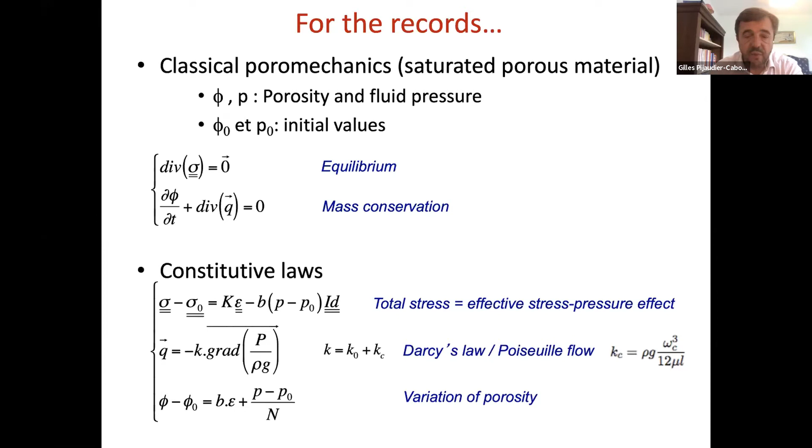Just for the record, so that we all have in mind that within this format everything should be coupled. Now these are the equations. The reality, let me first start with a very simplistic example: gas production.

What people do, at least in the industry, where they design the exploitation of a field. Here it's supposed to be a gas field. Let me just get a pointer there, where you have wells that produce and wells that inject. And of course, all the hydrocarbons are contained in a porous material, in a reservoir, in a porous rock.

And what people look at is just the permeability. This is an important parameter to them, and they absolutely don't care about the effect of stresses. In most cases, this is a generality, but usually, at least at the industrial level, from a very pragmatic point of view, when you design the exploitation of a site, you don't worry about stress. Still, you have a porous material.

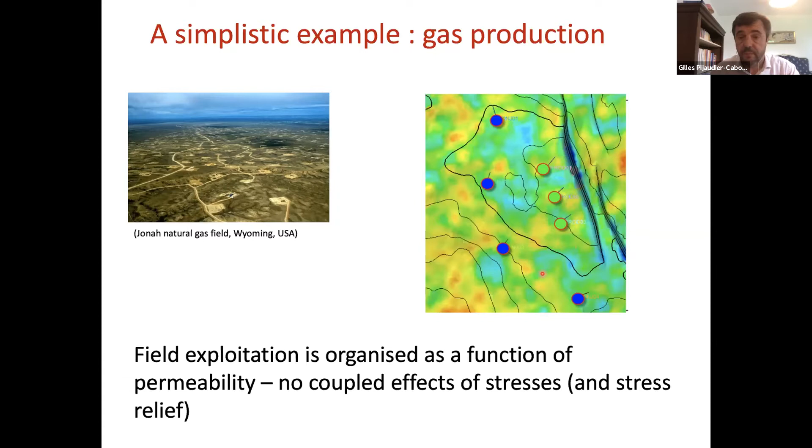Let's consider something which is a little bit more complex, and this is dealing with the safety of nuclear vessels. A couple of works that we did when I was in Nantes a few years ago, where we were concerned with the internal vessels, a specific design in France, where these vessels are made of pre-stressed concrete. You have a double layer vessel, and both are made with pre-stressed concrete, or one is reinforced and the other

is pre-stressed. Concrete is the third passive barrier in the safety design of such vessels, and it is monitored with decennial integrity tests. Basically, they apply a pressure inside the vessel. Of course, they stop everything. They apply a pressure, and they measure the leakage rate. And if the leakage rate is above a certain threshold, the facility cannot be restarted.

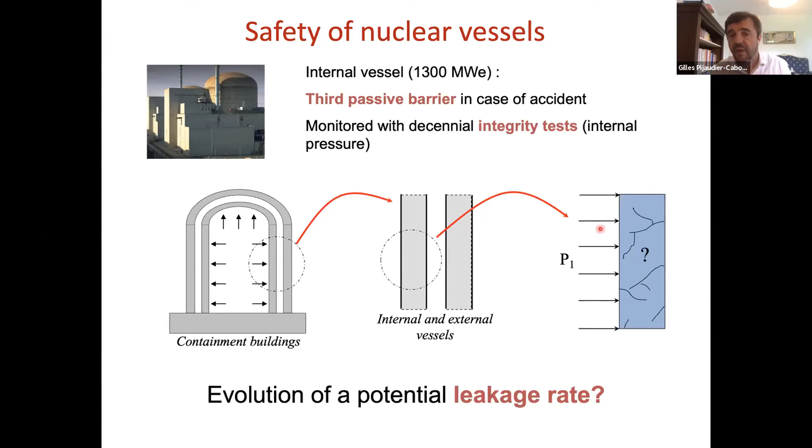So the issue is to evaluate a potential leakage, which is due to the aging of the concrete. And here you would expect that there is a strong coupling, at least between the solid phase and the fluid phase. The solid phase is made to prevent the fluid from going from inside to outside the vessel.

So typically what is being done now, it has most probably been a little bit improved, but not that much, because these are rather complex structures which are pre-stressed with passive steel bars, concrete, just considering a representative volume like this, and then you apply the pressure inside and you measure the leakage rate outside.

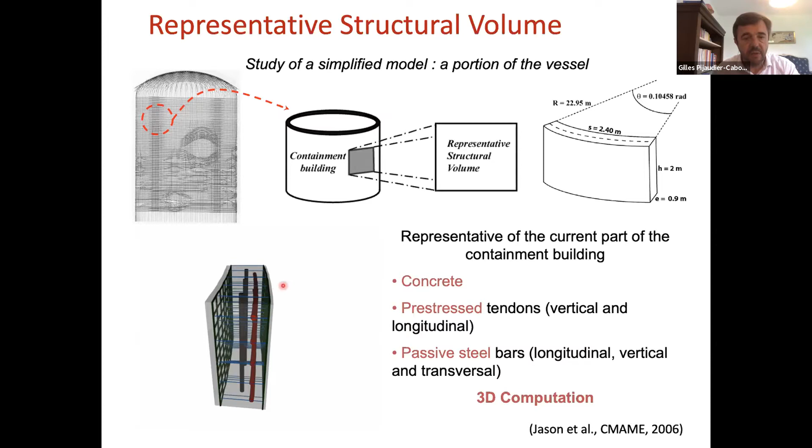And what is currently being done is first a mechanical calculation. Due to the internal pressure and the boundary conditions, you apply whatever mechanical model you want. Here it's an elastic plastic damage model, and you calculate the damage which results from the internal pressure on the vessel.

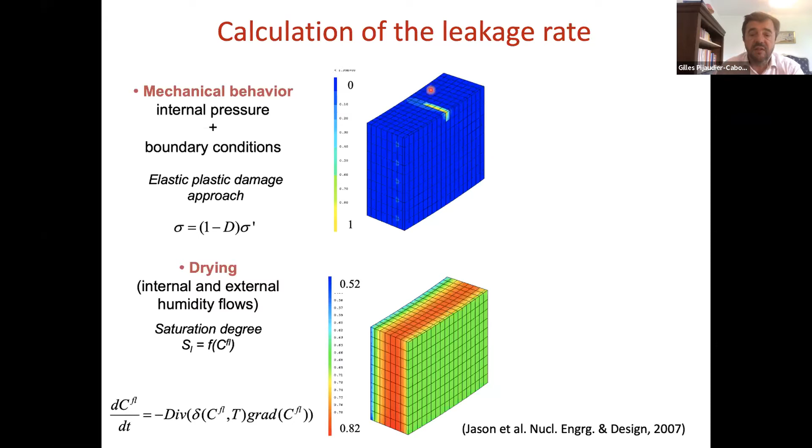Then you take into account the drying effect, and you perform a calculation of the profile of humidity, which is there. And separately you perform a calculation of the leakage rate based on the gas permeability. So you convert both information from the mechanical model and the hygrothermal model into a relative permeability to gas, and that provides you with some calculation of the leakage rate.

So here there is some coupling, but in fact everything is uncoupled. There is some coupling in the sense that the amount of cracking, the quantity of liquid which is contained in this representative volume has an effect on the fluid flow, but it is not coupled. It is just a one-way coupling.

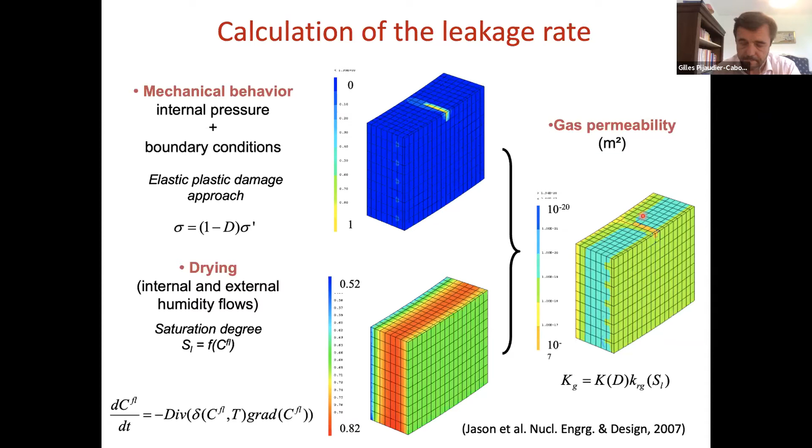Some more complex example. Here I took the case of adsorption of a single gas in a porous solid, with many applications in the industry, that concern carbon, but also cement paste, tight rocks, and many other porous materials. The issue is that in this case, the fluid is in small pores compared to mesopores and macropores; you have micropores of a few nanometers in size at most.

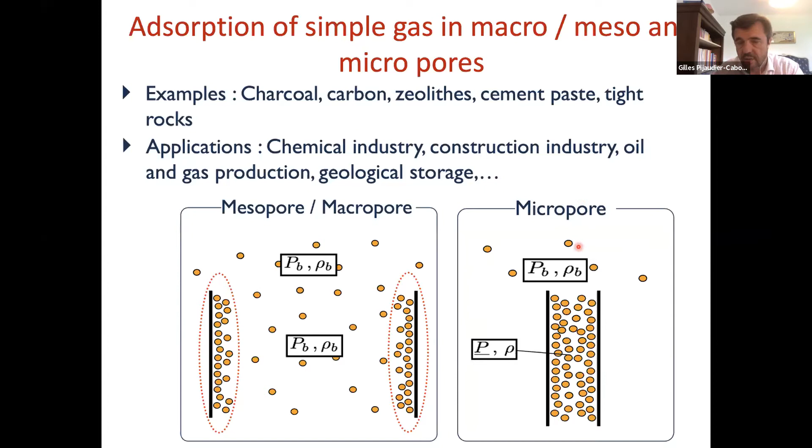The fluid that is concerned is confined by the solid phase, and it is in a different state as compared to the fluid in the bulk phase. Different state of pressure, different state of mass density. And that produces a very unexpected response. That is, if you take this piece of porous material, you saturate it with a gas, you increase the pressure, and instead of shrinking, it is going to swell.

And this has been measured quite a long time ago. Here you see some results of Levine in 1996, measuring the swelling as a function of the pressure in the fluid.

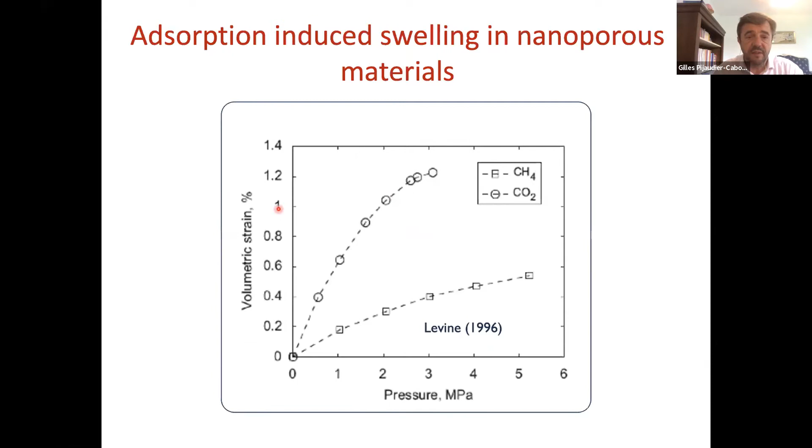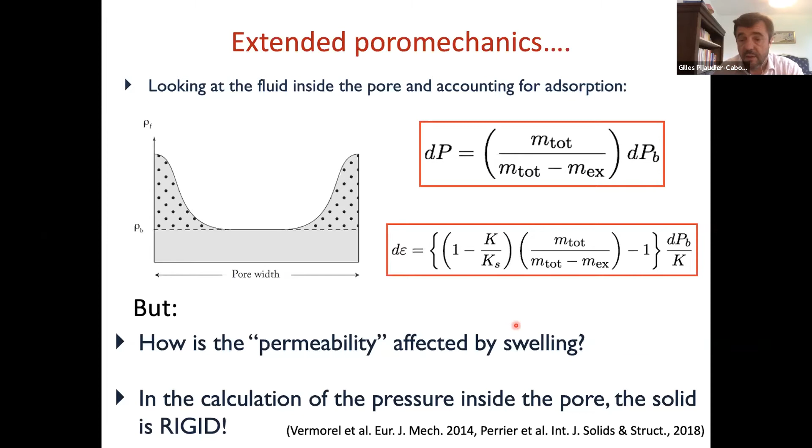And in this type of calculation, where you would expect that you have strong coupling between the fluid and the solid, in fact, the solid is assumed to be rigid as far as the fluid is concerned. And that is not a coupled scheme. It is coupled, but not completely. So what I would like to conclude with was that in most practical examples, you have indeed coupled effects, but they are not important. Whether they are second order effects or not, I wouldn't dare to say, but they are, for practical purposes, not very important.

When coupled effects are important, in most cases, it is a one-way coupling. It is not a two-way coupling. And I believe that Roland is going to share with us cases where you indeed find such a two-way coupled effect. Thank you very much.

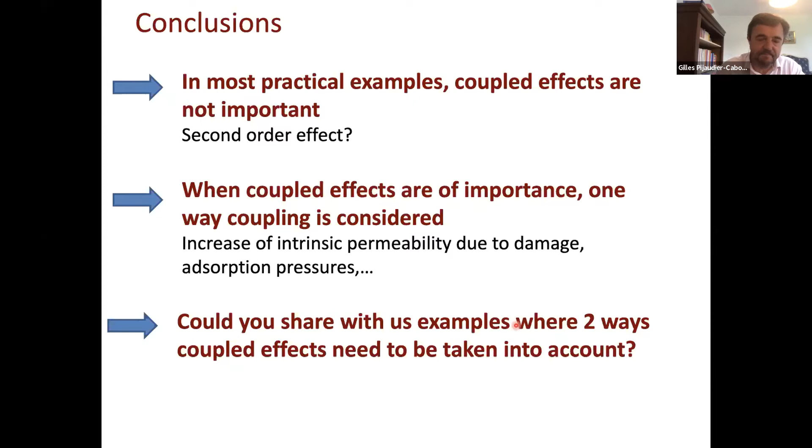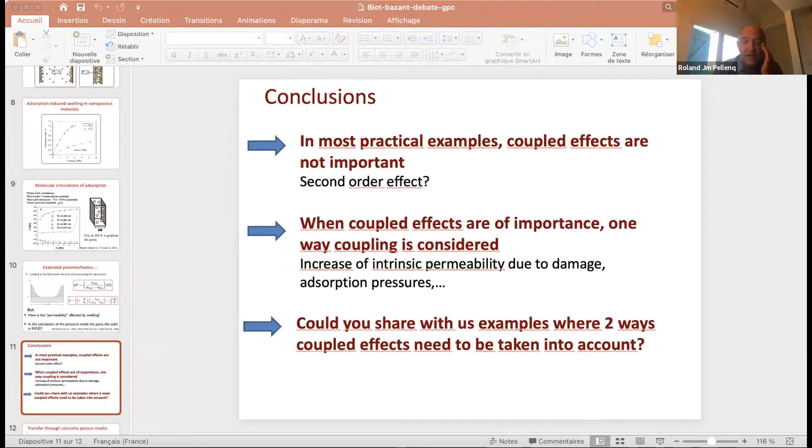Excellent. Thank you. Thank you, Gilles. And now is Roland for the arguments against. Yes, sir. Here I am. So who's sharing? Gilles, you maybe have to stop sharing your screen. Yes. That's done. Very good. Now I need to find my presentation. How's that working? Yes, it looks like we have some. Very good. Perfect. All right.

All right. So, well, thank you for the invitation. Can you invert the screen because we are seeing the... How do you do that? If you go to the top, there is swap displays. Where is it? To the top? Yes. Stop video. Where is it? Oh yes. Swap. Switch. All right. There we go. Very good. Excellent. Thank you. Because I have two screens there.

All right. So, well, I was saying thank you for the invitation. And actually, I was wondering about that format, this kind of debate idea, and at the end it turns out to be interesting. Obviously, I'm not opposing Gilles in what he was saying because it's obviously interesting. The idea was for Gilles to take the side of the solid matrix and me more where I'm coming from, which is the side of the confined fluid, and see how much the fluid is influencing the matrix and how much the matrix is influencing the fluid. So this is the way I'm going to go through this question, answering at the end. All right.

So next, talking about porous solids, I want to go down to what those are. Obviously, you can take simple ones, not so simple, but I'm saying simple because they are crystalline. So those zeolites. One of the leading members of the zeolite family, which is a family of 500 members, is the one called silicalite. It's been used in the oil industry to convert methanol into gasoline and so on. So the pure silica stuff, but you see, this is very ordered. That's the sketch of the pore network, and the size of the pores is typically 5 angstrom, half a nanometer, very small. Then we have the messy ones. For instance, porous carbon, still the same kind of pore size, but this is really more like a glass.

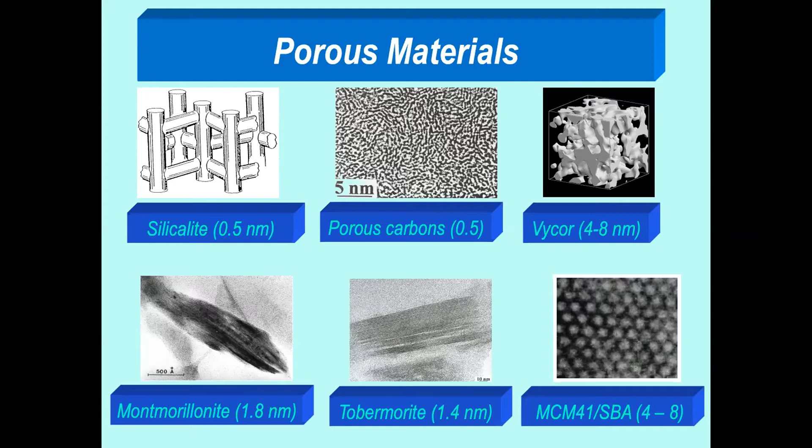Then I go to more ordered, those MCM and SBA, so still silica, but they are made from soft chemistry, where you do this ordering of an organic surfactant phase, and then you just burn it, and at the end you're left with the porous matrix, and these are proper cylinders. The walls are actually not crystalline like a zeolite, but the pore size, a few nanometers, is controlled by the size of those organic molecules.

And it's interesting because these are not connected. This is the most ordered thing that we can do. When I say ordered, they are not necessarily smooth along the channel. Could be some roughness, obviously, but okay, that's what we have.

And we have those two very dear examples, which are soil and clays, for instance, montmorillonite clay, where you have a swellable system, clay that does swell. And so the amount of confined fluid in between the lamellae is changing. By the way, this time the confined fluid is an electrolyte, meaning a solvent, water for instance, and some ions.

And the most interesting thing is that those layers are charged. That's why you have ions, and the ions are driving the intake of water in the system. It's a very coupled system.

And then we move on to cement or tobermorite. Tobermorite is not really cement, it is a mineral per se from the island of Tobermory in Scotland. And this is actually a layered system like clays, and charged. So again, you have ions in between the layers to maintain electroneutrality, and water as a solvent getting in because of the ions.

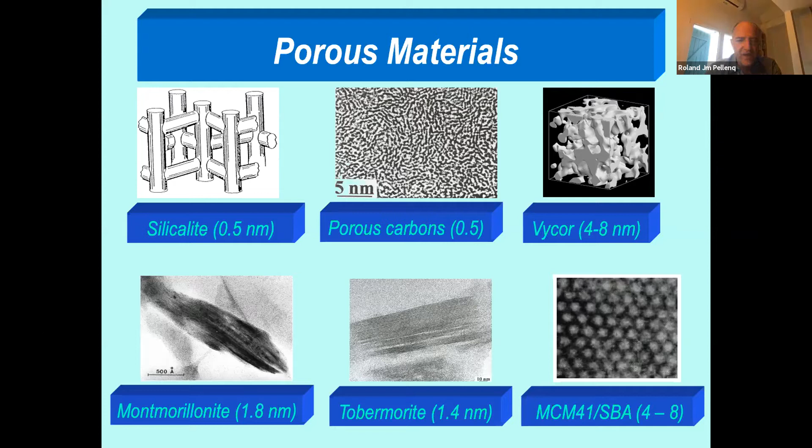All right, so let's move now to other concepts. Porous carbon is probably multi-scale. For instance, this is a porous carbon. This is a piece of wood at the scale of, say, 100 microns, and you see the cells of the wood. And now you dig down and you see some structure appearing. This is burned wood, actually. This is a charcoal, right?

As we zoom and zoom, you see other textures appearing. At the scale of 1 micron, you don't see much, but yes, there is substructure, because if you zoom again with a TEM microscope this time, not a scanning electron microscope, you start seeing nanopores clearly, up to the range where you see the scale of angstroms.

So those natural porous materials, as opposed to zeolites, are multi-scale. When I say zeolites are just one scale, it's not true, because you can gather grains of zeolite and build up a multi-scale porous material. The multi-scale is important because certain things can happen at certain scales and not at others. So that's one key element. Sorry, this is the further zoom at the scale of angstroms.

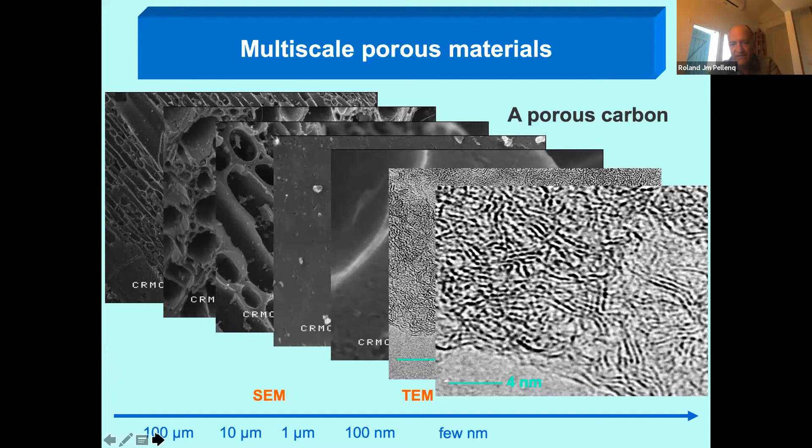All right, confined fluids. What kind of fluids? Molecular fluids, of course.

Water, cement, and clay, cement, and so on. Could be hydrocarbon molecules when we're dealing with shale and so on. I said that cement is water and ions. It's called an electrolyte. Okay, that is a key step, having those ions to maintain some electroneutrality, because it does influence a lot the coupling between the fluid, the electrolyte, and the matrix itself.

Could be covalent fluids. Why not? All right. So these are you can build. It could be metallic stuff and so on. So today I'm going to clearly focus on molecular fluids.

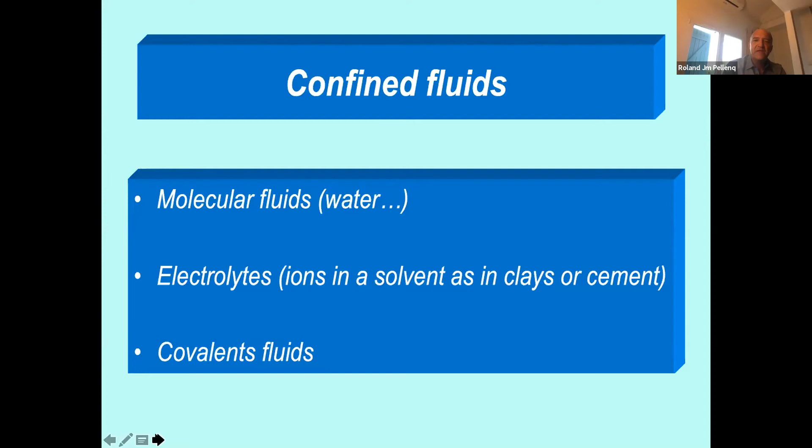All right, so to what I just said, for a long time, any modeling of those porous materials was assuming pores with a given type of geometry, cylinders or slit pores on the left and right, with a given size, maybe with some pore distribution, but in every one of those attempts to model a porous material, those pores were not connected. All right, so something to bear in mind.

And this is where this ranking of pore size actually comes from. It comes from a paper in 1985 from the IUPAC, which is the International Union of Pure and Applied Chemistry, that produced this rule, saying that micropores are less than 2 nanometers, mesopores are less than 20 nanometers, and all above is called macropores.

The reason for that, and there is a physical reason for that, is that when the confinement becomes so strong, it kills any phase transition of the fluid. The way the fluid structures in the porous material is entirely due to the interaction with the solid. All right. When we're in the meso range, we do still maintain some kind of phase transition, such as the capillary phase transition, also known as capillary condensation or capillary evaporation, depending on the way you put in and take back the fluid.

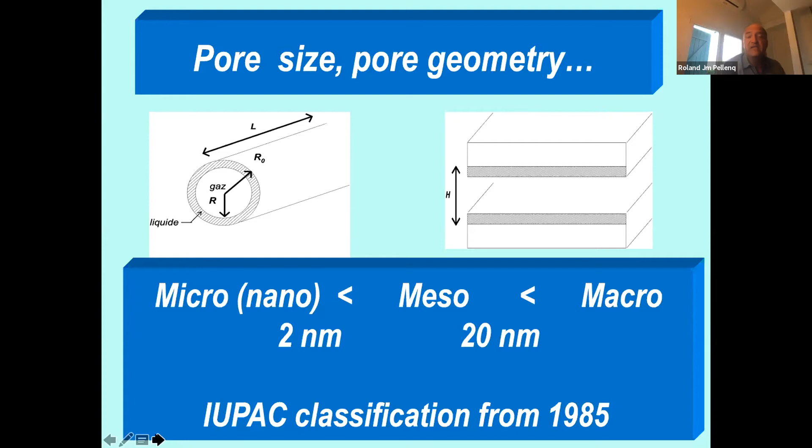And that is actually not the bulk one. As we'll see, that is totally shifted. So this is, again, a way to see that the solid does influence a lot the confined fluid. And the macropore is typically when the pores are so big that there is no confinement effect. And basically, the fluid has the phase diagram of the bulk.

All right. Obviously you understood that we can play with different sizes, and we can play with the texture in terms of order or disorder. And this is an old slide that I've been presenting for maybe 20 years now, where you can, on this x-axis, go from ordered systems to disorder, from MCM-41 to Vycor, and in terms of pore size from zeolite to mesoporous systems when you go on the vertical axis. All right.

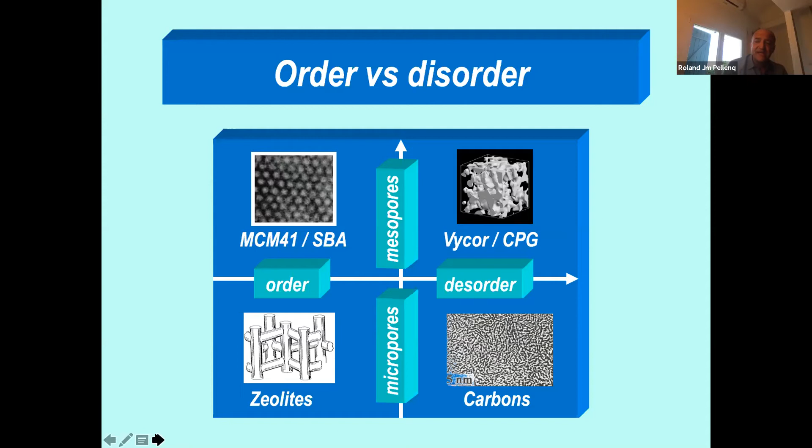Okay, that's a very usual plot. I'm going to spend some time on it because typically when you put some fluid into a porous system, people want to measure that. Why? For good reason, because these are the adsorption isotherms. Isotherm means at constant temperature. And adsorption means that this is a physical process that brings a fluid to a surface or to a porous environment. And there are different types of those adsorption isotherms that are said to characterize the type of environment.

Say that we consider curve number 2. This is the curve of an open surface where the fluid actually likes the surface. And you see that as you increase the pressure of the fluid, you see adsorption taking place. You have this curve with a B point. We have a knee forming, right? That corresponds to the building up of a layer at the surface of the pore. So you see already that the fluid can be in the gas phase far away from the surface, but it's already in a very condensed phase due to interaction at the pore surface.

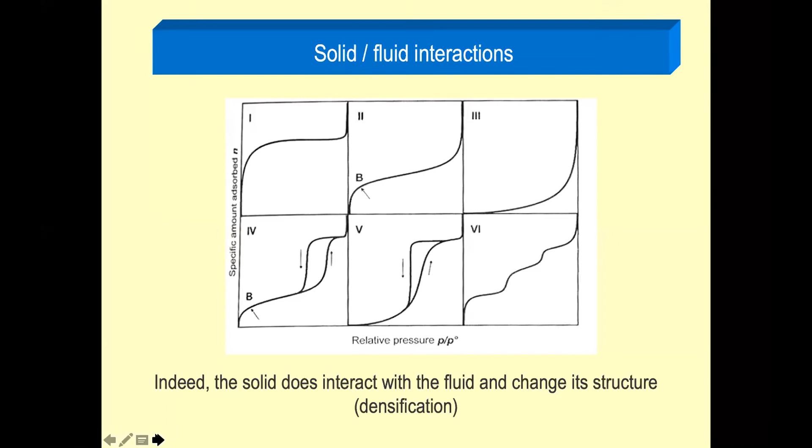Right? You say, okay, but what happens now if the fluid doesn't like that surface? Then we go to plot number 3. This is typically some kind of fluid that doesn't like the surface. You're not building up this molecular layer. So for instance, that could be where water doesn't like some substrate, and in the end, you need to pressurize water to the liquid phase in the bulk, so that in the end, you have a condensed fluid somehow in contact with the surface.

All right. Now I will comment on plot number 6. 6 is this wavy one.

That wavy one is a bit like plot number 2, but when the surface is so well organized with no defect, no cracks, no lacune, no dislocation, nothing, that the fluid can actually pile up in a very defined layer structure. That has been observed, for instance, I think it was methane on some MgO, magnesium oxide surface. Argon on graphite, I guess, will do the same. You need to have a super well-defined surface. And then you start piling up, and every step corresponds to a one atomic size layer of the fluid.

All right, now we move to porous material. If you take a mesoporous material, as I said, a pore size where we do maintain phase transition, that's typically what's happening in plot number 4, where you have capillary condensation, and that is characterized by that hysteresis loop. So on the way up, we don't take the same path. When we increase the pressure, we suddenly have the building up of this film at the B point and so on, and suddenly the pore fills up totally with liquid.

When we depressurize, we try to take out the fluid. The process doesn't go through the same path, and we have this hysteretic behavior that is fully connected to the fact that we have a first order transition of the fluid inside the pore system. But what is interesting is that this capillary condensation is actually not the bulk one; it's actually shifted towards lower pressure.

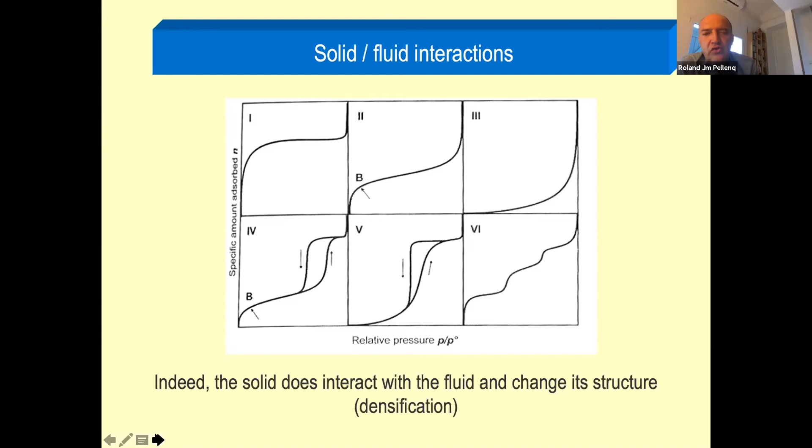Now, I want just to illustrate something with a concept that is used by everyone, this concept of specific surface area. So the idea is what? The fluid is supposed to cover all the surface in one monolayer film. Why not? If you know the size of one molecule, then you're measuring the surface available to the fluid, measured per gram. You have a number of square meters per gram. This is the specific surface area.

Some years ago, with Pierre Levitz, a colleague from Paris, we did this calculation. These are simulations where we were doing the specific surface measurement, using grand canonical Monte Carlo simulation of very simple fluids, different rare gases, neon, argon, krypton, xenon, in Vycor. Vycor is a mesoporous glass. So we were measuring the beginning of the isotherm, that is, measuring the surface.

And it turns out that there is a linear dependence of the specific surface area, this geometric quantity measured by everyone, as a function of a specific property called the polarizability. In this case it's very simple, because when you write the interaction of those rare gases with the surface, this is the only term that attracts molecules to the surface. This is called dispersion interaction, also known as the van der Waals interaction, and it is proportional to the polarizability of the interacting molecules. So what's interesting is that if you do the adsorption of xenon, you have half of what is measured by argon for the same substrate.

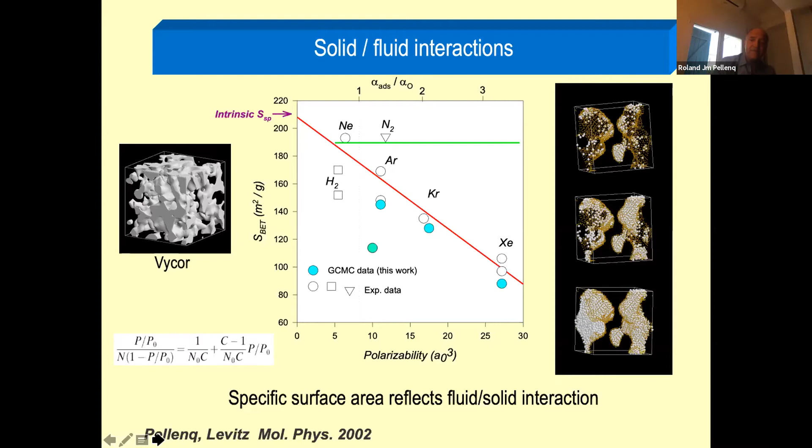So you see, by just that example, the interaction is really driving even the building up of a monolayer or a few layers of molecules at the surface, obviously, even in porous material. So now coming back to differentiate between nanoporous and mesoporous. For instance, this xenon in this zeolite silicalite. The blue points were my simulation, the green the experiment. So we can very easily predict the thing. And there is nothing heroic in that, because silicalite is a crystal. You just download the crystal atomic positions, and you're done with the simulation basically.

All right, so porous silicon, this is here a plot from the PhD of Benoit Coasne. This is argon in porous silicon at 77K. So you see, as I said, the physisorption and the capillary condensation, which is obviously absent when you are in very small pores, as I said earlier. And those porous silicon have a very nice, well-defined pore size of 10 nanometers.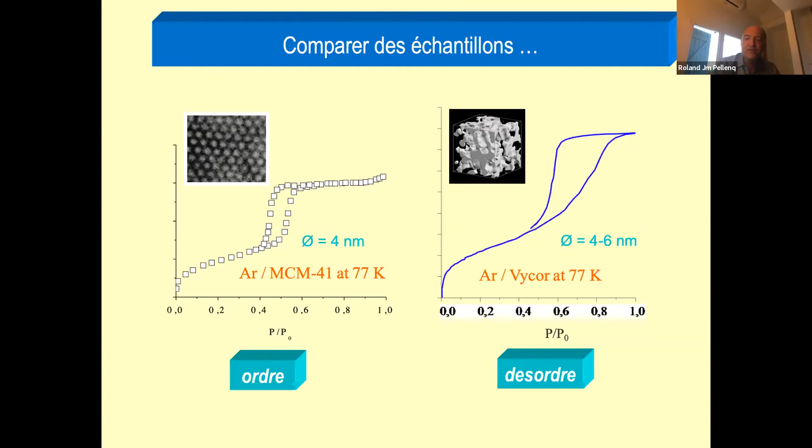Actually, the desorption line is at equilibrium. It follows the Kelvin equation. The adsorption line in Vycor is just showing the fact that you have different environments. So you have a kind of gradual filling up of the pores, in some parts condensation, in other parts no condensation. At the end, you have this very smooth signal on the way up. But on the way down, this is basically a desorption that corresponds to the Kelvin equation.

All right. If we dig into the physics of that, the work that was done in the 80s, 90s by those people, Evans, Gubbins, and so on, using different theoretical approaches and molecular simulations, is that this is a real first order phase transition. And for instance, for an infinite tube, you have this sigmoid type of van der Waals equation for the fluid that is shifted from the bulk, obviously. And if you write the equality of the two areas when you go up and down, the Maxwell construction, then you can localize the equilibrium.

And the desorption line corresponds to something called cavitation. You break the liquid, actually. So you depressurize the liquid to a point where it breaks, basically. But then Maddox and Gubbins showed that if the pore actually has a finite length, which is the real thing, obviously, then the desorption occurs at equilibrium, and you don't see this cavitation thing. You go through the equilibrium.

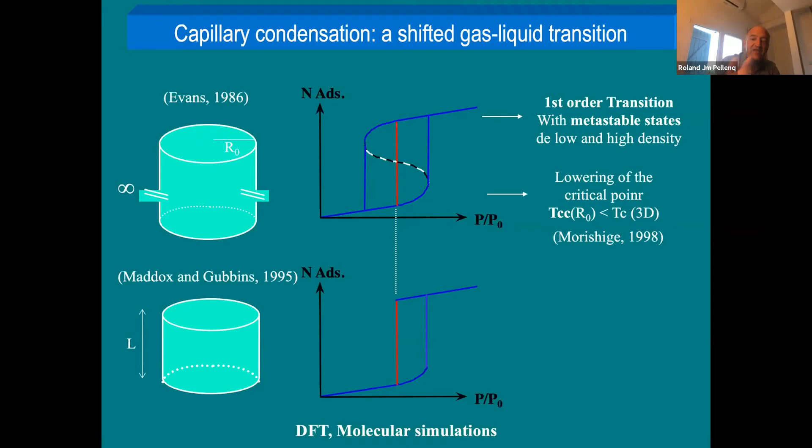All right, now let's move to temperature effect. This is the very, very important work of Morishige back in 2004 in MCM-41. You see that when you increase temperature, the hysteresis loop disappears, and then you switch from a discontinuous behavior to a continuous behavior, adsorption, desorption wise. And that again fits very well with the concept of phase transition, first order, but shifted. So the solid does influence a lot the liquid, even in those kind of bigger pores where you can still have a phase transition.

The plot on the right is a recent work that we published, this is the PhD of Siavash Monfared, who is now at Caltech. He was with us at MIT, and this is the shift of the critical point of the confined fluid, because the confined fluid, although it's experiencing a phase transition, is not the bulk one. So there is a new critical point that is due to confinement. You see, again, the confinement, the interaction shifts things.

And what's interesting in this work, besides all the points that you can see, is that we have this linear behavior of the shift of the critical point with 1/r, the pore size. Sigma is the molecular diameter. And what's interesting is the orange point here. If the solid is kind of dilute, in the sense of not very packed, like a granular system with a packing fraction of 0.5 something, around that point, then actually most of the time the correlation length in the liquid is the same as in the bulk, and there is not much confinement. So in this case, there is less coupling.

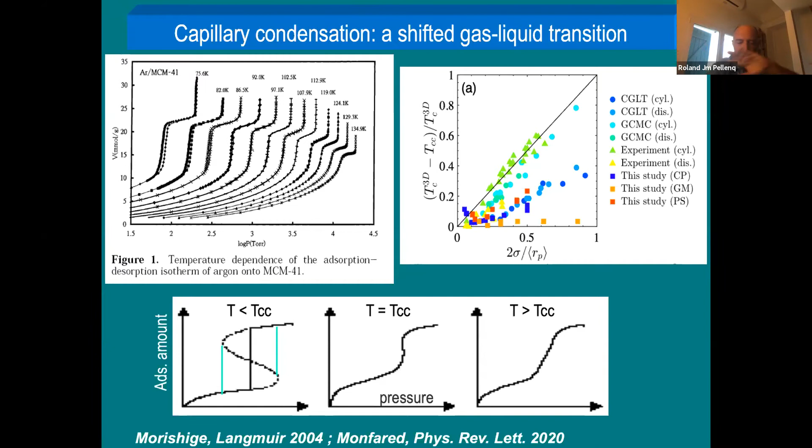All right. So this is what we're saying here, a kind of summary of the whole behavior. Below the TCC, which is the confined critical point, you have the hysteresis behavior that disappears when the temperature is increased to TCC, and obviously we keep this reversible behavior above TCC.

It's just my point that you can write down this free energy of a fluid layer in equilibrium with the gas phase. Very simple. You have a surface term and a volume term that's coupled through this exponential term. If you write down the F(R), which is the free energy of the system, that's the exponential term. And then you can derive the Kelvin equation, which is this equilibrium relation that you see at the bottom, with a term here that is the correction of the Kelvin equation when you go down to very nanoporous systems.

And obviously, the breakdown of that is when you reach a pore at a given temperature so small that you don't have any phase transition. All right, so it does work pretty well.

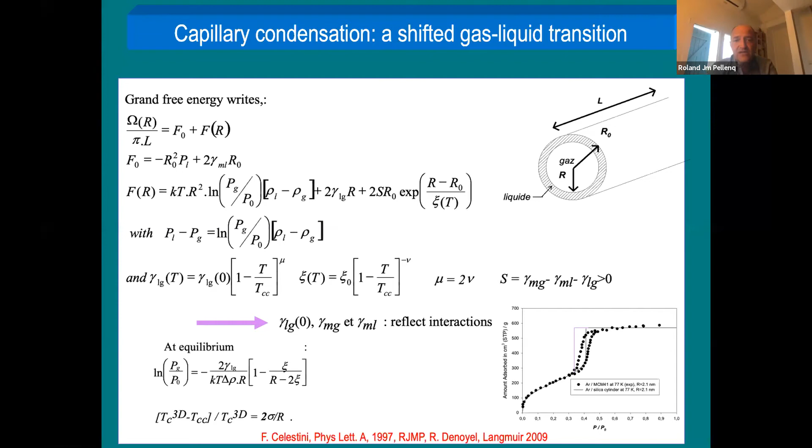Roland, can you please wrap it up? Yes, I'm almost done, actually.

All right, so you can see with the molecular simulation points here that you have this curvature, and the line is the Kelvin equation. So the Kelvin equation should be taken with care because we need to correct gamma, the surface tension.

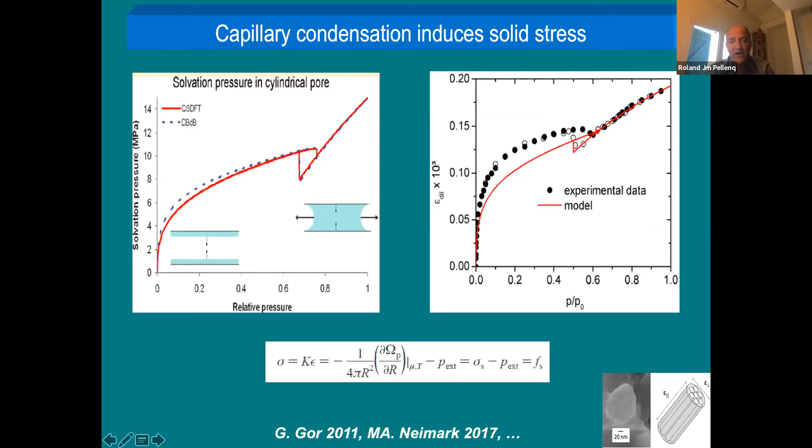And then I'll come to poromechanics, which is that the fluid does actually modify the solid in terms of swelling and shrinkage, and this is typically what people have been doing, relating the solvation pressure, which is the pressure of the fluid, to the strain experienced by the matrix itself. You can read the papers of Gennady Gor or Alexander Neimark. These are good authors to read.

We did the same kind of poromechanical system for a granular system in cement, and we have the hysteresis loop, and within the hysteresis loop we could calculate the shrinkage, the strain due to the capillary forces bringing the grains together. That's the work of Edmond Tingtao Zhou some years ago, two papers.

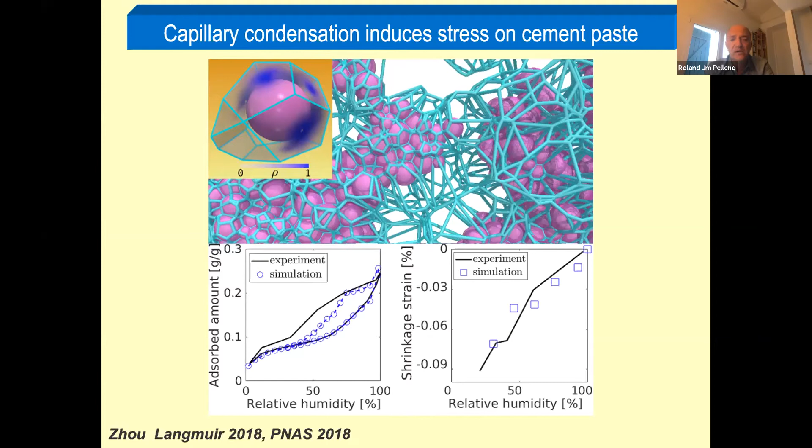And then my last slide will be about the zeolite stuff, and this is my encounter with poromechanics, 1995, where I was trying to simulate this curve of argon with the step in the adsorption, and I didn't get anything. That's my green points. They were shifted by a lot, and that was not a swelling, by the way. It was a change of symmetry of the solid. Clearly the fluid did change the symmetry of the solid.

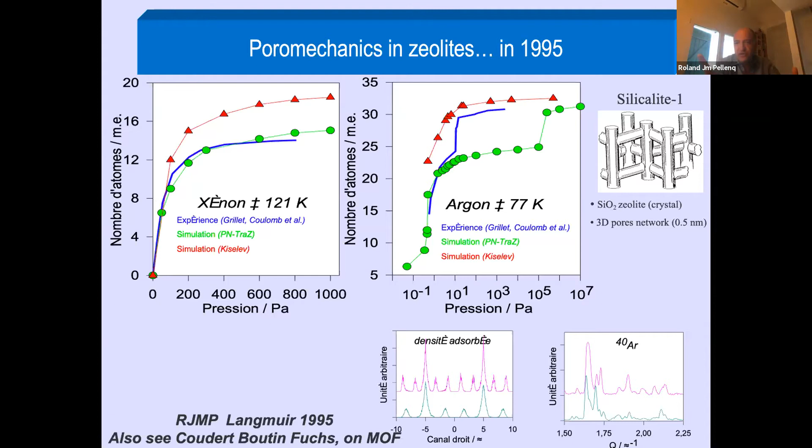And just to add on that, people in Russia knew way before me that in very small pores you can adsorb fluid and, depending on the pressure, it can shrink or even make the thing swell. Same for porous carbon, which we did with Laurent Brochard some years ago.

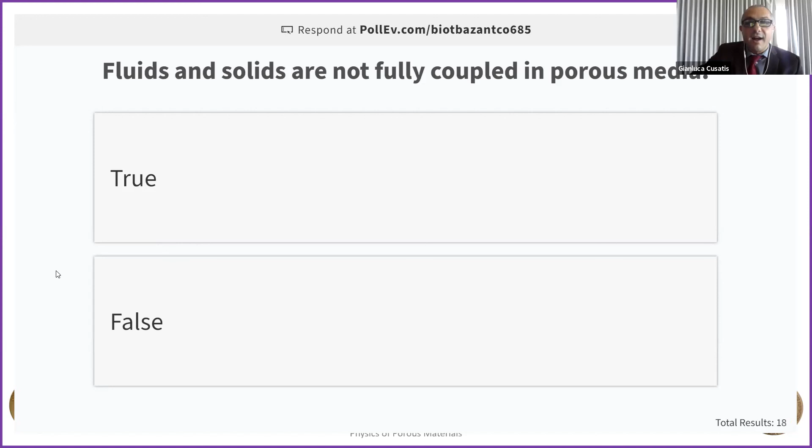And the last one is to decide whether Gilles is winning or Roland is winning. They don't win anything other than writing the paper. But still, the one who is winning is writing the paper, right? Let's do this: whoever wins, initiates the first draft. It's getting close, guys. And the winner is...

It's closer than I thought. So, Gilles, you write half of the pages, okay? No, 40%. I think we can use this as a page breakdown for you. 66% for the false, 30% for the other, so definitely Roland is the winner. Thank you, it was excellent. Please join me in thanking the speakers.